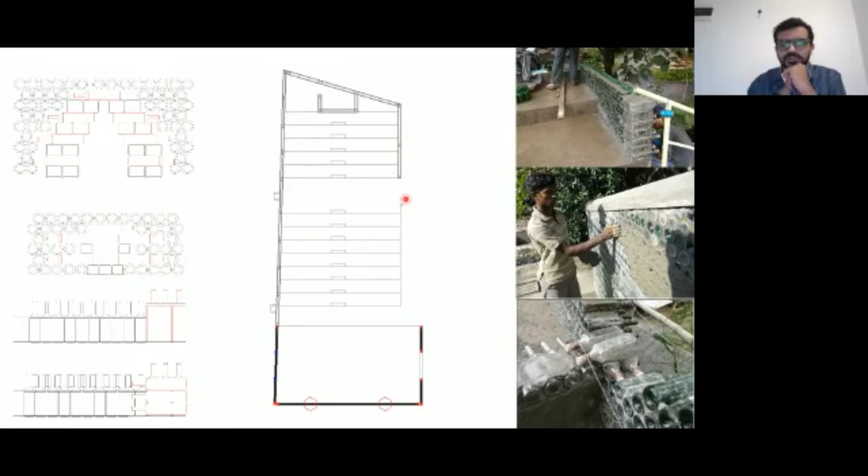This is the plan of the school. The theater is on top, and the theater entry is from this side. Interestingly, till date, whenever I go back to the office and the site, I always see certain changes, different from when I visited many years later.

One of the additions were these bottle walls, and the requirement was very simple. There was a cantilever slab running on the periphery of the terrace, and the wall had to protect the audience from falling down, as well as protect the vision of spectators sitting in the seats looking at the theater.

Interestingly, Shiksha Niketan was built not just with scrap materials because Sir wanted to use it, but because it started off from Sir's wife Nisha's foundation - the Nisha Play School, which is a pre-primary school, and this primary school. The whole project was funded by the office itself.

Because of the low budget, many parents contributed different architectural materials - second-hand wood, some gave their beds where the steel could be reused, some gave tiles to be used for flooring, and so on.

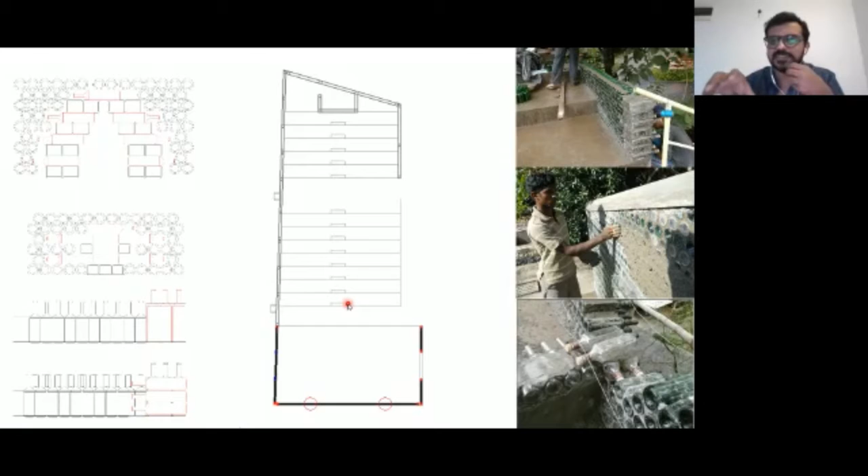Interestingly, one of the materials we received were these bottles. I'm assuming Sir had asked for these particular bottles to be used in Shiksha Niketan, but at the end of the day we received a lot of bottles, and I was left with an empty site terrace with many bottles. My task was to figure out how to actually make these walls.

One interesting thing about these walls is that this parapet wall is actually a freestanding wall - it's not located between a structure, between two columns or between two walls. There's a longitudinal force exerted by the bottles in each course at the end. Our task was to design a self-supporting wall where the bottles could be held by another structure or other courses - what we call stiffeners. So if you see in the plan, these are the stiffeners.

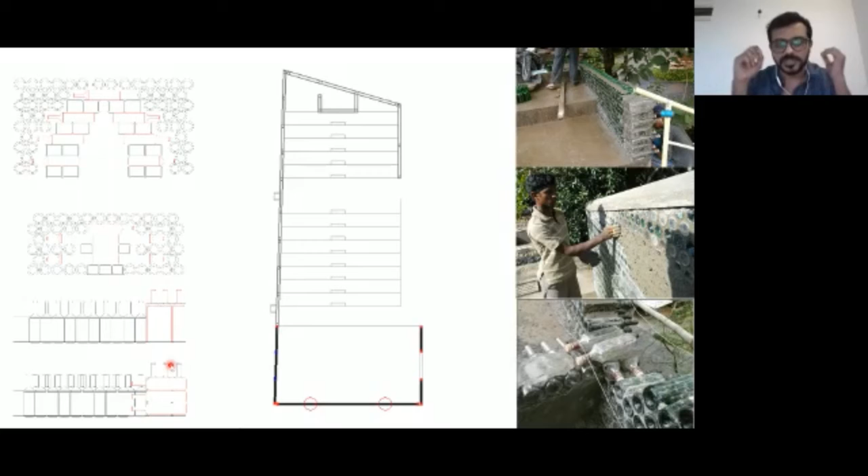Interestingly, what worked for us and was totally in demand was Signature whiskey and also Blue Riband gin - because these were rectangular bottles, which helped me understand and relate to brick courses much better. But of course we had other beer bottles, wine bottles, even medicine bottles and ketchup bottles, since these were donated by the students.

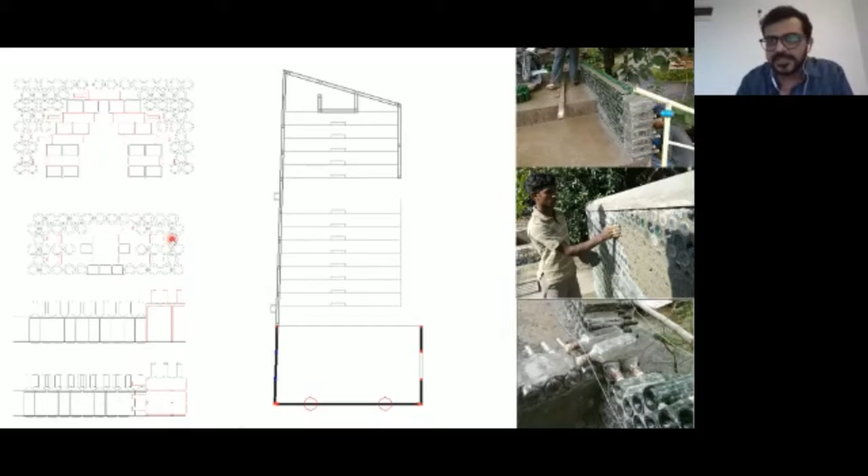I won't go into the details of each project, but I'll concentrate on the main topic - how the contingencies act. So these are some of the finished wall details. As you can see, the entrance is from the front here. This was our first testing wall.

That's why you see many Tuborg bottles, because that was something I was very comfortable with - two Signature bottles gave me three courses of Tuborg beer bottles, and it was much easier to start off with. Of course, at a certain point I ran out of Tuborg bottles, so then I went for Kingfisher. But slowly and steadily, we realized how to work with these bottles.

Slowly we created ventilators, which are very important because during windy monsoons we're assured that not enough pressure is exerted on the walls. We developed drains in the walls as well, and of course created an archway - this was definitely done by Sir. We also played around with the bottles themselves, since it's part of the school and part of this fun amphitheater we've got on top.

Interestingly, I would take you to one of the stories of development. So this is what I was left with before I started the project, and I come and see definitely different types of bottles all around the place.

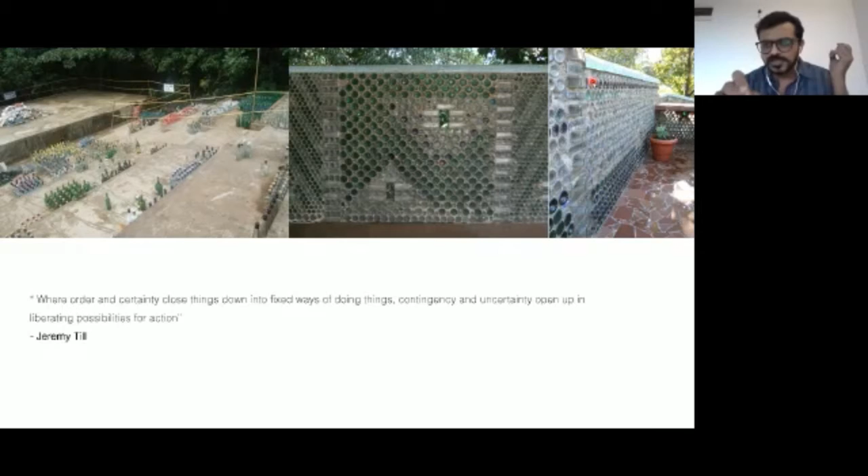So I go around, I tell the masons, please use whatever bottles you want, but make sure the bottles in each and every course have the same height. And of course at the end of the day I get this chaotic wall.

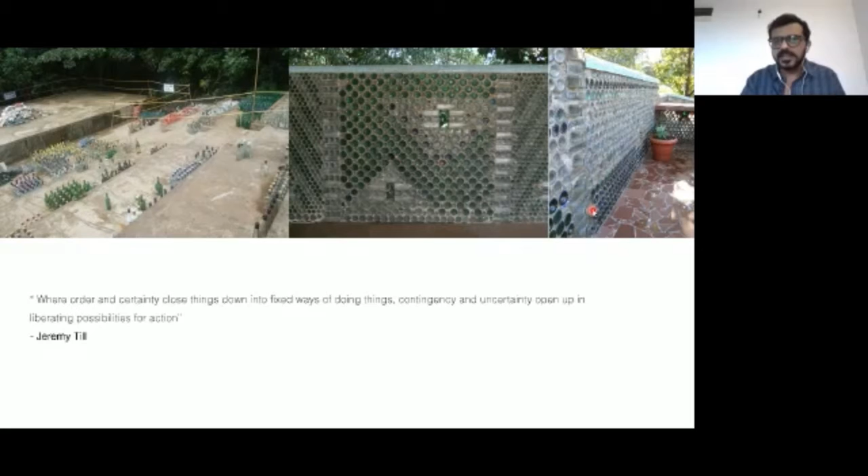This is a learning curve for me, which actually made me realize even if I have this contingency of availability of bottles, I have to channel it in some way. I can't just leave it as chaos, but I have to realize what are the different gaps available in this particular chaos and try to streamline it in a certain way. So then we end up with these different patterns of walls.

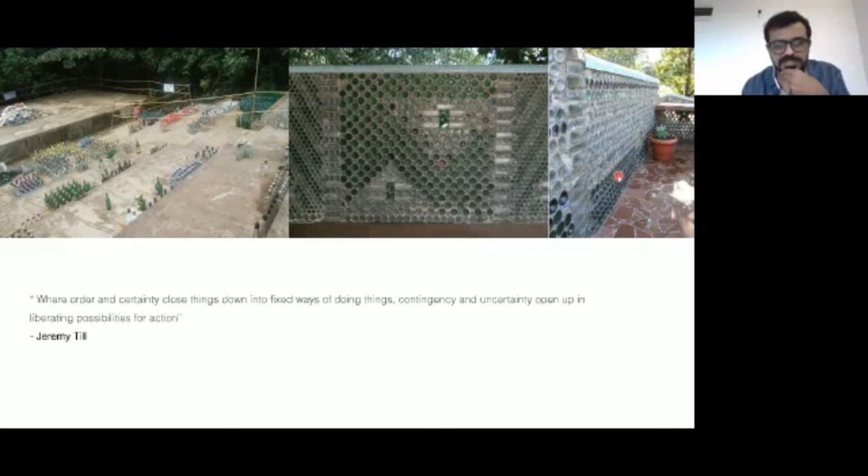I'll take you to the next step of the same bottle wall. This is actually the stage, and school, after 3 or 4 years of building the bottle wall, now wanted something new, which is a stage cover, because it is Goa and they wanted covers during the monsoon.

This is an interesting project in itself, because it actually taught us a lot - at least my personal experience - of how to use bamboo as a material and how to use natural elements as building materials. Here we've actually used treated bamboos with steel junctions, and this has been there from 2013 and it is still here. It's of course an experimental project.

The process actually started off with a simple idea of how about we have a tensile structure which is actually held up and pulled up by the trees next to it. This was very interesting because this was still a discussion within the design team - it was me, Sarita, and Sir together, and we were discussing how we can build this particular structure, because the school had many different requirements, even holding huge, large amphitheater speakers suspended from this particular structure.

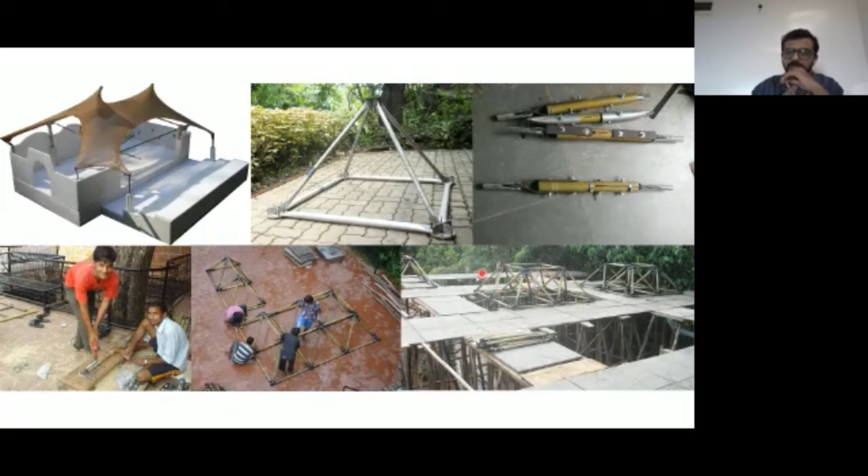So we've got a shuttering on the stage, we put up these particular modules pulleyed away, and then we've come up with this particular structure.

Now, the detail I would like to get into is the instance of developing that particular design. Like I've already mentioned, we came up from a steel structure to using a bamboo structure. And using a natural material definitely has its own advantages. But what we are used to in an educational system are standardizations.

So our engineer is very clear - he's never worked with bamboos at all. But what he could help us out with is giving a design for steel. And it was our job to understand how he's using the steel design and try to interpret it using bamboo in collaboration with Konbac.

So a bamboo usually came up to 5.5 meters to 6 meters. And what is interesting to note is that the bamboo tapers at the end, as you all must be very well aware. It turns out that the bamboo is quite strong at the bottom, fairly strong in the middle, and not that strong at the top.

The first thing - and of course this is Mallappa, our helper, he said, 'Sir, ye particular cheese chalega, use this instead of steel.' And I was like, how do you know it is strong enough? And he climbs and jumps on it twice. He was like, 'Sir, we do this for our houses at home when we build it with wood or bamboo.' So somebody climbs on top, stands and sees, jumps around, and if satisfied with the strength, we come down.

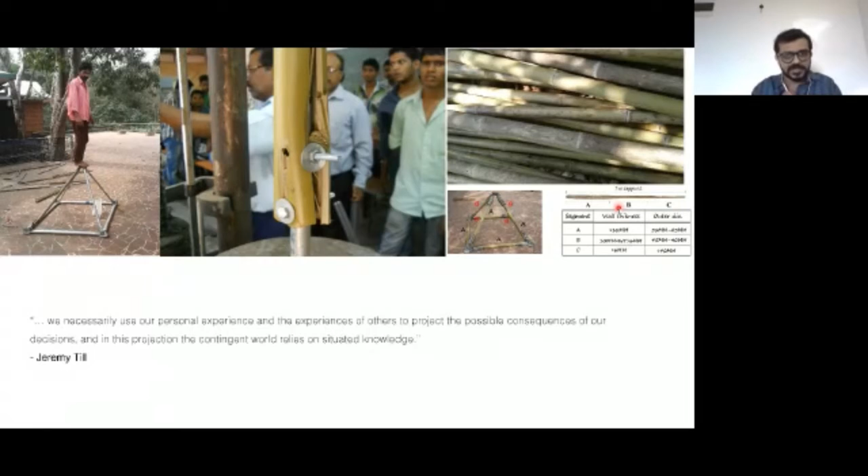What's interesting to note is these shared experiences on the same background. The Konbac guy is saying, I know the touch and feel of the skin and I know how the nodes of the bamboos are. On the other hand, the explicit knowledge of the structural engineer coming together on this platform, and they're sharing their situated knowledge, which helps the contingent world of architecture. None of these guys alone, or we alone, could have done this particular project. Us coming together definitely helped us.

Now I come to the other project. This is called Chronicles Club. This is in small Vagator in Goa. It was done in 2013, which is actually a long time ago.

Interestingly, this is the site how we had got it. Basically, it's a waterfront club. So the requirement was for a dance floor, a bar and a dining lounge, and some VIP lounge as well. And the site we actually got was this amazing site looking at the Arabian Sea.

You've of course got this famous Om rock cut restaurant on the left. The site actually dropped about 18 meters, and you had these laterite rocks and a small laterite quarry at the bottom. And you had these coconut trees spread across the whole site.

Interestingly, what we and Sir actually proposed were certain zonings. So this is the quarry which is downstairs next to the sea, and we thought we would make the dance floor here. So you are just next to the sea, and you have access to the beach whenever you want when you're dancing as well.

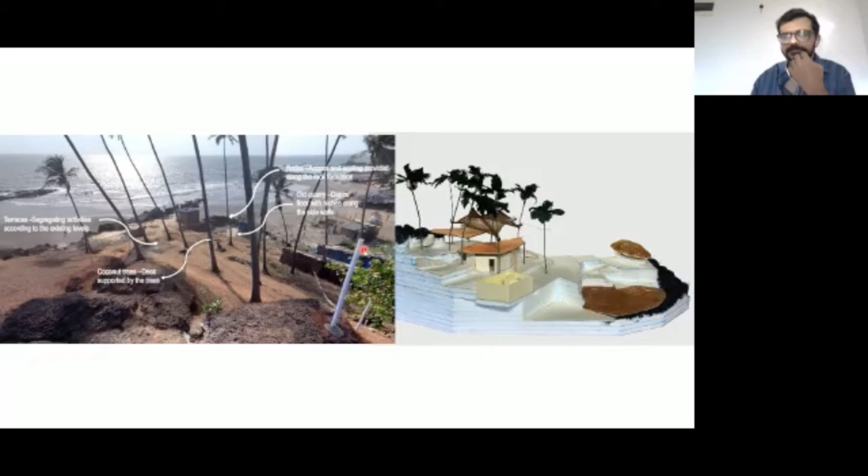So we have the scheme, but at the end of the day, we do not have the final drawings. This is something Sir was very particular about, that we won't be designing each and every detail. I'll come back to that later. But what I'll do right now is just run you through the project itself.

Since the site was right on the shore and it was a leased site, interestingly, it was sanctioned as a seaside shack and not an official club. That means it had to wind up its whole setup during the end of summer, close down for the monsoons, and then restart during October. Anything we did according to the CRZ rules, applicable for any structure within 100 meters from the shoreline, needed to be temporary. That means anything we did, we should be able to take it out and give the site back as it was. So one of the major starting points for us was temporality.

How do we get the nature of temporality on this site? Of course, we went with certain techniques. We've got sandbag retaining walls in combination with dry stone masonry with vaults, arches and domes. On top of that, we have wooden structures which are dug up and grounded inside this particular wall and structure. We also have certain modular elements, for example these small concrete boxes which could be put in during construction, pre-casted blocks which could hold the railing and certain electrical boxes, and could be taken up and taken home whenever the site needed dismantling.

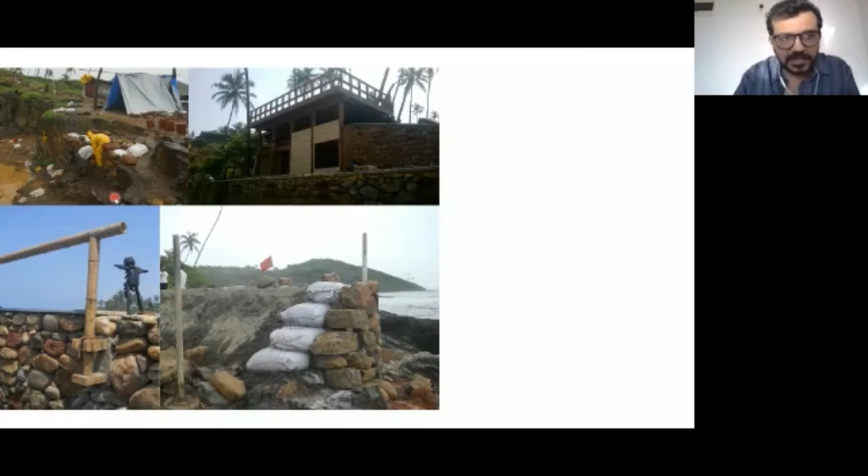One of the most interesting parts of the project was this quarry we're talking about, which has this lining of basalt actually, with certain laterite formations beside it as well. We had to take into account all the fissures in the wall itself, the stone wall, and the design had to be developed accordingly. This is, of course, the final product of how it looks.

What I would actually like to concentrate on in this particular project is something most of us as designers are not used to, which is designing on site and not having a drawing.

Trust me, it was very hard for me to find this particular drawing, which is still incomplete. It doesn't have any text, it's just a plain site with certain areas in it, because there was no drawing at the end of the project. The executed drawings were quite hard to document, and we had already handed over the project. But we definitely had these smaller details.

If you see, the rock features are something very organic that could not be documented. This particular drawing, which is actually the staircase wall developing right now, also took about half a day to document.

These are as-built drawings as well, right? And that's when we decided we wouldn't be making any as-built drawings. We would be designing on site. This is an idea that comes from Sir. He has certain methods of using chalk powder and seeing how each and every element on site, as well as how the mason is confident about certain rocks and certain heights of the walls, come together in this process, which interestingly doesn't come through in the drawing itself.

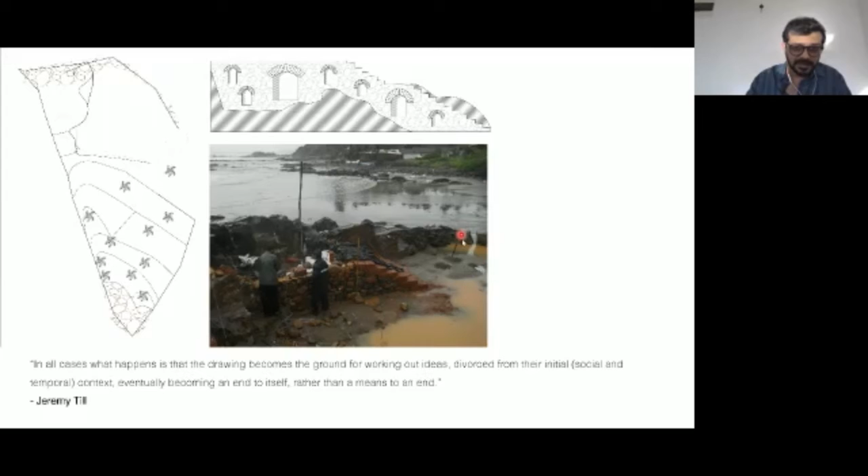It's also about where the tide is down, we are down in the quarry itself because the water level is down. This construction happened during the monsoons, meaning the whole area used to be filled with water during a heavy shower or when the tidal waves came in.

A very interesting quote from Jeremy Till: in all cases, what happens is that the drawing becomes the ground for working out ideas, divorced from their initial context, eventually becoming an end in itself rather than a means to an end.

On the other hand, we have this particular interesting method, and I'm not stating this is the only solution out there, but this is something I faced and experienced with this project, where the drawing doesn't become just a means of communicating and working out ideas. Working on site and developing and marking things on site becomes a means to take into account contingencies and the temporal nature of the project, and also the social and economical aspect of it.

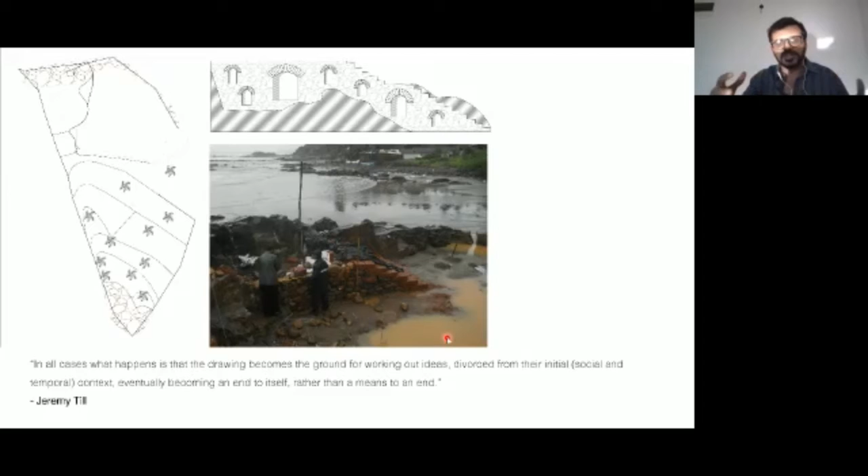I remember having this conversation with Sir, where we said, why don't we use tensile materials where we could use certain long-lasting materials that are still temporary, because they can be taken down, instead of using agronet, since its lifespan is about a year. Even the bamboos we used weren't treated bamboo like we did in the Shiksha Niketan project.

His reply was very simple, and I didn't understand it quite well back then, but I do understand it now, and I have a different perspective on the project. He said that this particular project needs to come down every season, meaning it has to go up every season. It's equivalent to putting up your stall - it's an activity in itself. Each time they put up the stall, let them decide what they want to put up, what they don't want to put up, what they want to add, what they don't want to add.

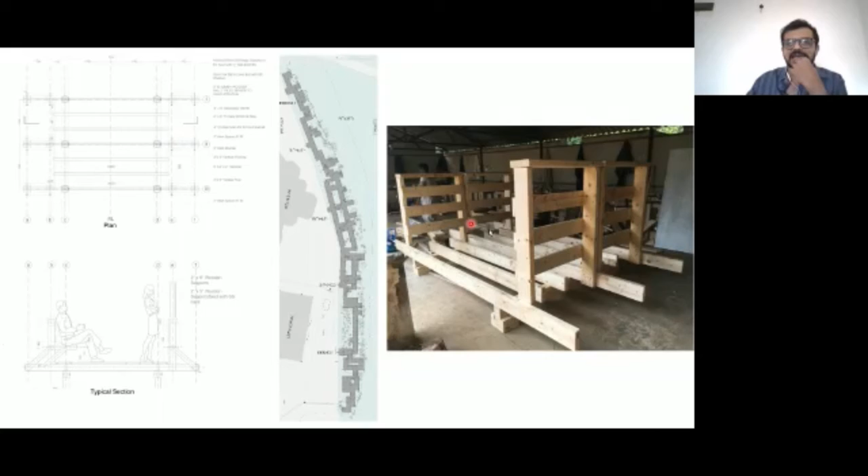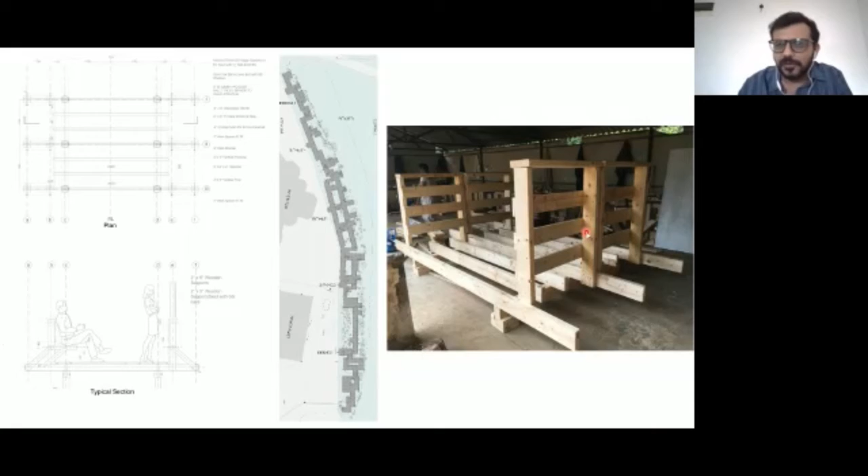So you can see these particular modules - each and every part of the whole mangrove walk could be dismantled, and could be replaced in the future, because at the end of the day we do realize it's a governmental public project, and anything which rots because it is exposed to such an environment could be taken out and changed.

On the right side you could see the pile testing for taking certain loads, and this testing reveals something about the loads the piles could take. So we have munda wood which we have used, and we have teak wood used on top.

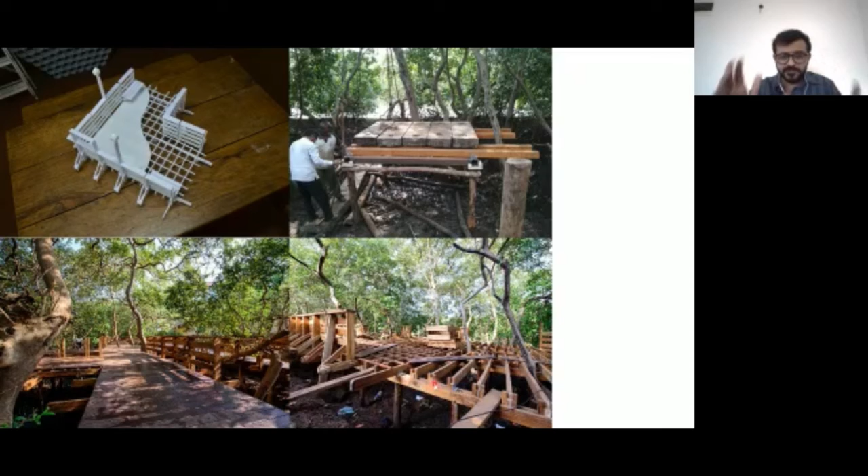So you have these horizontal running meter lengths, and wherever we encountered roots between 2.5, we could just change it in one of the x directions, or we could change the whole system of the primary members into the y direction as well, according to what the site wanted. So the flexibility was between 1.5 meters to 2.5 meters center to center, how we could place the grid. And that's how we came up with these interesting nodes and junctions, and these decisions were taken on site.

So you can't really step into this place without gumboots, and you have snakes and frogs nurturing into this particular place. This is something we had to be very careful about - we don't disturb the setting of the mangroves itself.

And finally, we have the railings with seaters and certain floorings which come into the picture as well. Interesting to note is that this particular part of Panjim, the mangrove walk, is listed in the top 10 Instagrammable spots in Goa. So it has taken on a different shape. I'm sure everyone, whenever they visit Goa, should definitely have a look at this.

But what I would like to actually talk about is this particular aspect of sourcing the material, that is the munda piles. What interestingly happened was we had proposed a diameter of 200 which was very hard for the contractor to get. What we realized was that there are certain parts of the state which only outsource certain materials of certain quantities, and it was going over the quantities, so we had to change it to a maximum of 150 diameter.

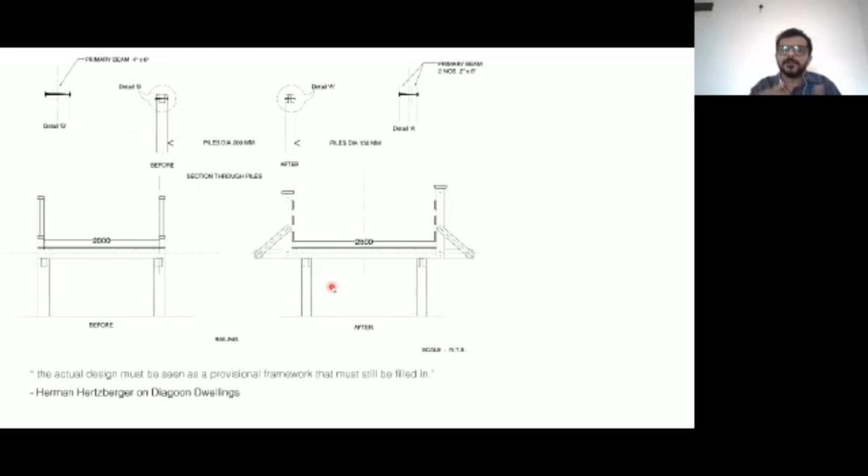But the framework in which this design was developed, and the modularity in which this design was developed, really allowed these contingencies to play around with, and different players also having the flexibility of proposing certain things, or at least putting across certain things - and designers, or the client, not being stubborn upon certain aspects of the design they want to implement.

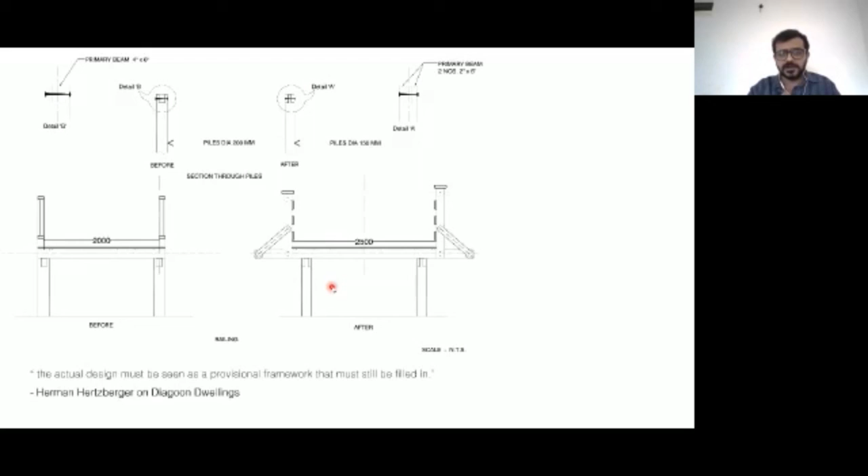I'll be taking you through the last project for the day. This is one of the projects we have done as a studio in Bangalore.

This is something called Negotiating Static Kinetic Play. It was a competition entry for a co-living space which was proposed. We are talking about flexibility in that particular sense, and about many different players coming together in developing this particular competition.

We are talking about the users who are gonna use the co-living space, the workers who are gonna be employed in these co-living spaces and the area around, and the people who actually invest funds in these co-living startups, and how they would benefit through this scheme. Finally, we talk about designers, because it was an imaginary process with an imaginary site. So what we interestingly proposed was a different distribution of control.

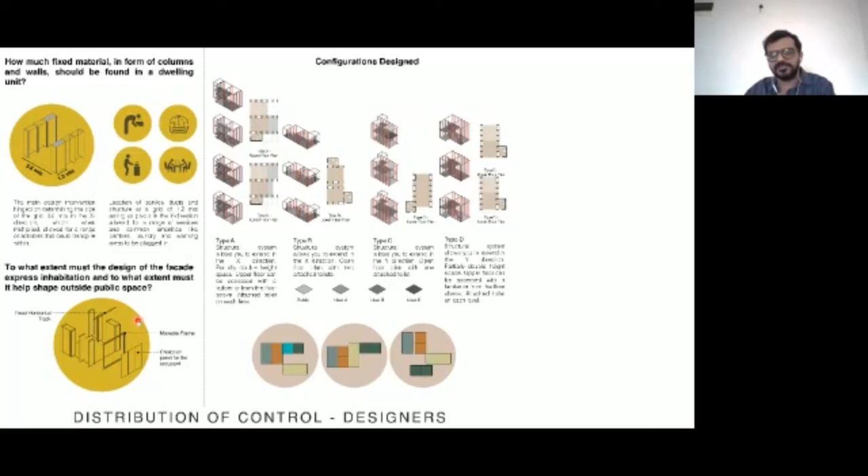So different people have different control over this particular project. We've set certain grids, and the designers could definitely play around this grid, use it however they wanted, keeping in mind certain amenities which had to go into the picture, and certain systems which were flexible enough to be dismantled. So you can see a certain arrangement of how we've shown it.

I'm not going into the detail, of course. On the other hand, we have the occupants, where they could actually carry away their walls with them wherever they move. So you have the app design where you could lift your particular wall where you have scribbled or painted it in a certain way, carry it with you, transport it to other places, and use it in a certain way in your home.

You also have the flexibility of deciding how much you can afford for a particular place, or what type of place you need. Do you need a kitchen? Do you need a balcony instead? Do you need the smallest room possible to reduce your cost, etc.?

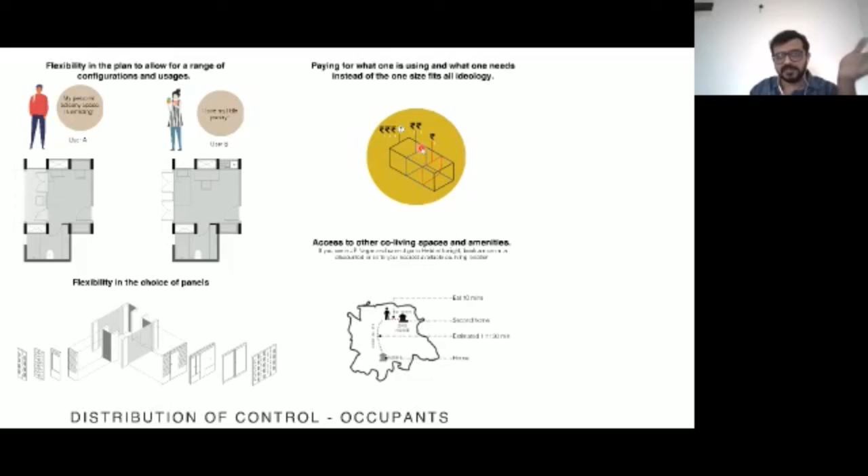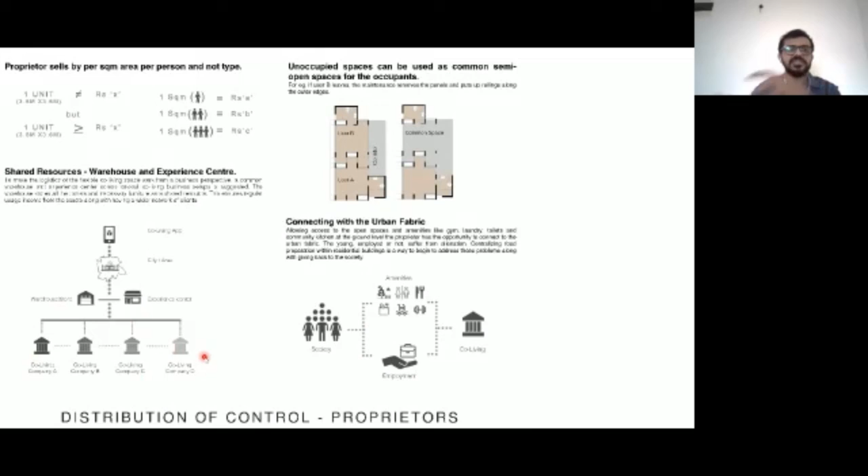And then finally, you have the proprietors, where you take into account the economics of how it could work, and you think about how different companies could actually benefit from each other working together with these systems.

But finally, what I would want to talk about is this final aspect of distribution of control, and how we actually thought of this project. Rather than taking this project and the competition ahead in terms of designing each and every physical aspect in detail, we thought of zooming out.

And proposing a system, a framework for the co-living space, where we had designed an app as well. You have certain grids which have been thought of, certain amenities, certain services which have been thought of. And the development of the system was served on a platter for the co-living proprietors, who were a part of the competition as well.

So what was interesting to know is the framework wasn't a concrete framework at the end of the day. It was just a starting point of discussion, just an idea thrown across. At the end of the day, it's not about this chaotic randomness proposition. It's still a discussion based on a certain framework and certain system which had been brought up.